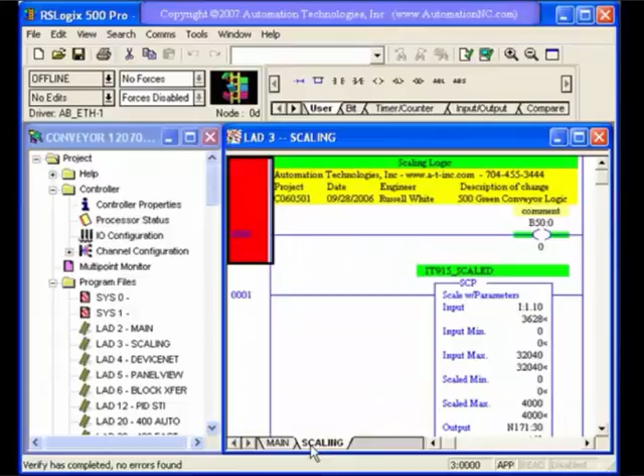What I'd like to discuss now is our ladder window. This is where all our programming is going to take place. This is the actual program that's being run and activated on. And as we mentioned before when talking about the project window, you can have several different ladders up. See, we've got our main ladder program.

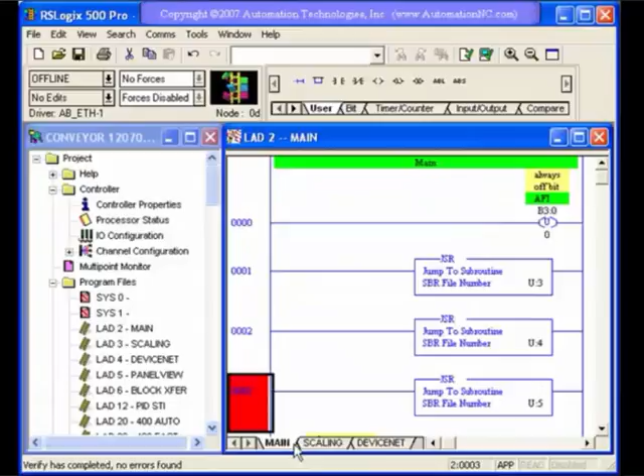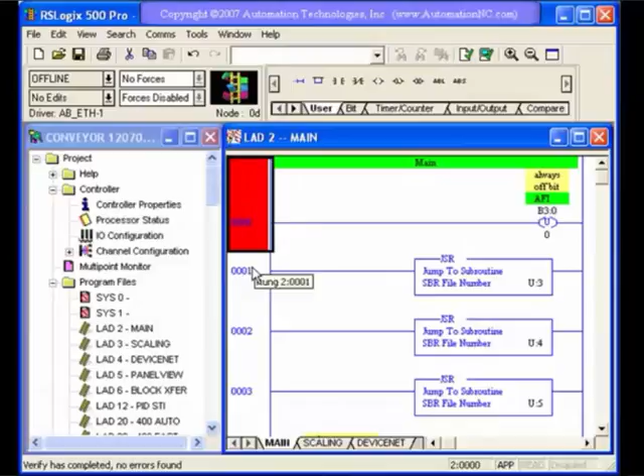I've got an area where I'm doing scaling, and we do try to separate our programs. We'll get into that a little bit later, so that we can make it easier to understand and easier to deal with. I can have several different programs up, so now I've got 3 different program files. Now these are different program files, but they are still all my same individual program that's running in this one processor. And what this does is give you an easy way to manipulate and get around your logic quicker, to get your logic in a format that's easily understood and easy to work with.

The last thing I'd like to talk about today is our toolbars and the different toolbars that are available here. If you remember, we could turn our toolbars on and off here in case you see one on my screen that you don't have on yours. Just by clicking, see, there goes what they call the tabbed instruction bar. This instruction bar is really going to be your most useful toolbar, I think, of all these different toolbars.

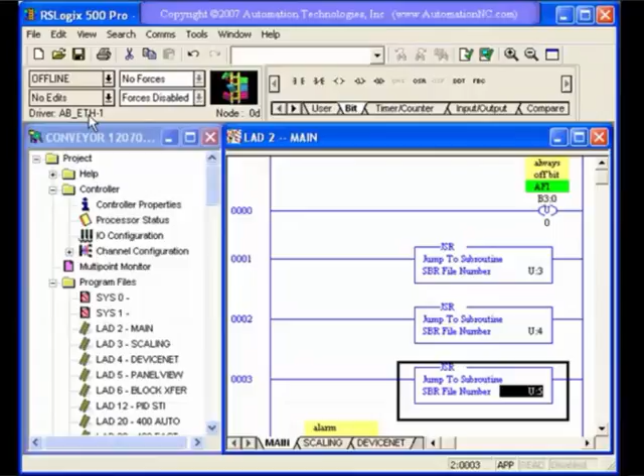You have your standard Windows open, save, new, cut, and the things you're used to in other Windows programs. You have the capability here to go online and offline and work with your forces. We'll get into that a little bit later. You also have some information up in this area that shows you whether you're online, how you're set up to go online, things like that. Some things are validation of your logic, which we'll have to get into later also. But the primary thing I want to point out now is this instruction bar right here.

You have the capability to enter instructions. If you notice, I just entered a contact here. You want to be careful. You don't want to put things where you don't really want them. This in Allen-Bradley style is definitely somewhere you don't want them. But this gives you an idea what you can do.

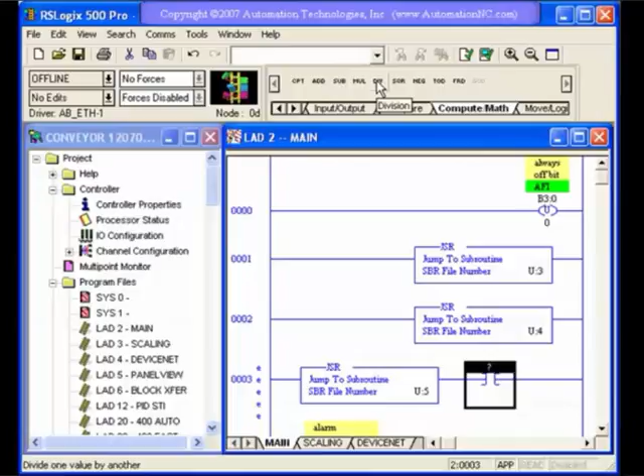They're organized in ways that are easy to find and grouped in a way that allows you to use all kinds of different instructions and look for an instruction that you may not quite remember exactly what it was. You can come up here and click and usually find what you're looking for. There's the divide. I need a divide. I click on that and I've got a divide instruction in my logic now. So this is very useful.

You may get to a point later on where you don't need to use this quite as much, but as a beginning programmer, this will be very important for you to be able to use to find instructions and insert them into your program easily and quickly.

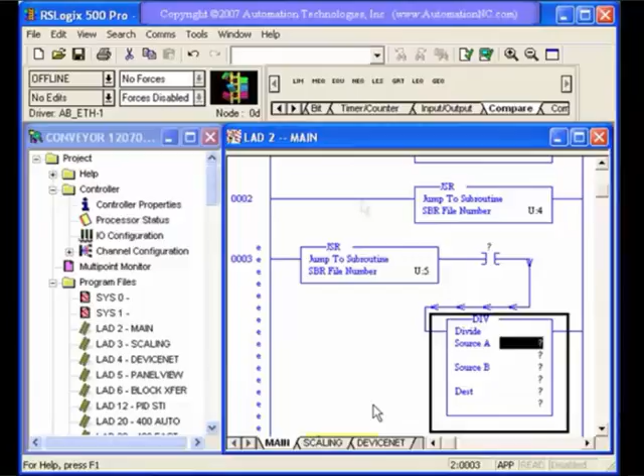Let's review a little bit what we've discussed during this introduction. What we've discussed is an overview of our different file and menuing commands up here at the top, just to give you an idea where those commands are and what these things do. I haven't gone into great detail. We can go into some of that a little later, but you know where they are, and if you hear about something or you're looking for something, you kind of know where to go.

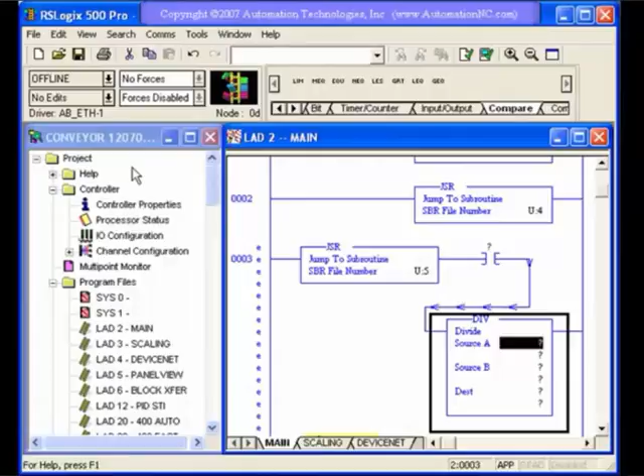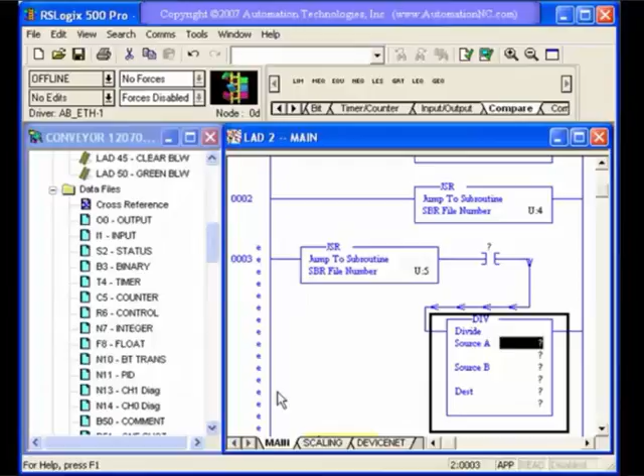The other thing we've talked about is our project window, which is very important to be able to open up and work with our ladder files, work with our controller and our controller properties, and work with our data files and manipulate the information in them. We also covered the ladder window and being able to open and go to different ladder files and manipulate them. You see we've still got our scary rung up here that we've edited with our toolbars, which is the last thing we talked about.

The most important toolbar I can think of right now for a beginner would be the instruction toolbar, and also having the capability to open, close, save, and look at some of the status information that we might have going on with our program. So this really concludes our introduction. Now, if you want to go further, we'll get into our different windows and file commands in more depth, and see if we can actually get into making a program and doing something constructive.